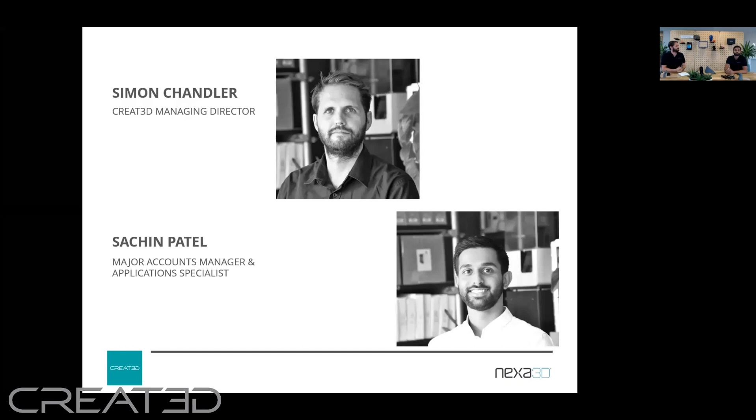We're going to give you some background on who we are as a business, who created us, give you some background on Nexa, talk you through what this technology is and how it works, and also do this live demonstration. My name's Simon Chandler, I'm Managing Director of CREAT3D. I also have my colleague with me. Hi, I'm Sachin Patel, I'm Major Accounts Manager and Applications Specialist.

Briefly, we'll talk about CREAT3D and Nexa, give you the demo, and we'll also give you some background on the materials. Sachin's going to take you through some of the applications and use cases of how businesses and organizations are actually using this technology today, and the benefits they're getting. At the end, there will be a Q&A, so feel free to put your questions in as we go along, or equally put them in at the end, and we'll have time for a few questions depending on what comes up.

CREAT3D are a UK-based additive manufacturing solutions provider. What that means is we work with all aspects of additive manufacturing. The bulk of what we do is we work with organizations to understand how additive manufacturing can add value to your business and can unlock cost savings, efficiency gains, and time savings. We work with you to integrate the equipment into your business in most cases, and we also provide all of the wraparound services, so installation, calibration, training services. We also provide all of the ongoing services like technical support, on-site engineer maintenance, repair services, and of course things like consumables and spare parts, anything you need.

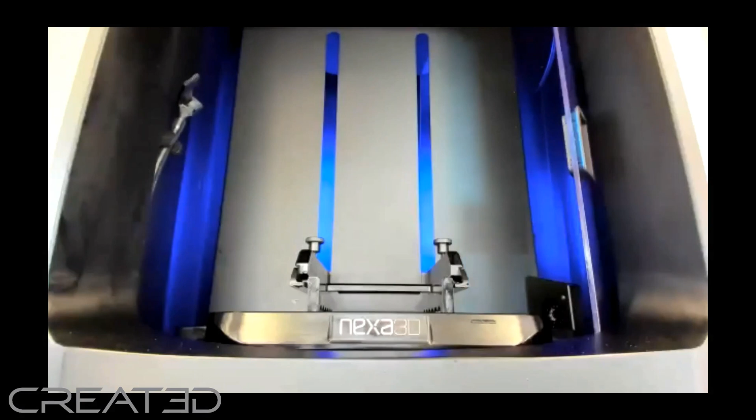So, to the exciting bit. We will now be running a live demonstration of the printer. We have the printer set up and ready to go for you. We're going to shortly transfer over to a different camera. There we go, that should be on your screen now.

My colleague Matthew has actually just initiated the printer, so it's going to be a little bit difficult for you to actually see a huge amount, but you should start to see the build plate rising up and down. The first 6 layers take the longest.

After that, it should be processing at around about 4 seconds per layer. What we're printing today is 126 clips in a single build. The total build time is 11.5 minutes, and that's 157 layers. We're printing this in what's called the XGPP blue resin, which is a prototyping resin, so it is one of the faster resins. If you wanted something in a more functional resin for end-use parts, it would take a little bit longer - probably 20 to 22 minutes to complete the same build in a functional resin.

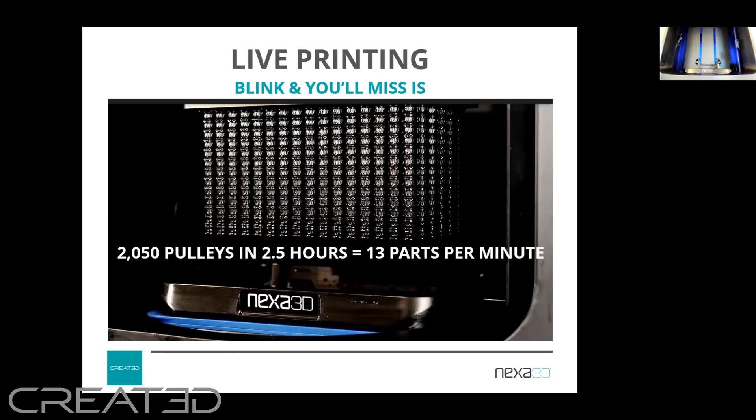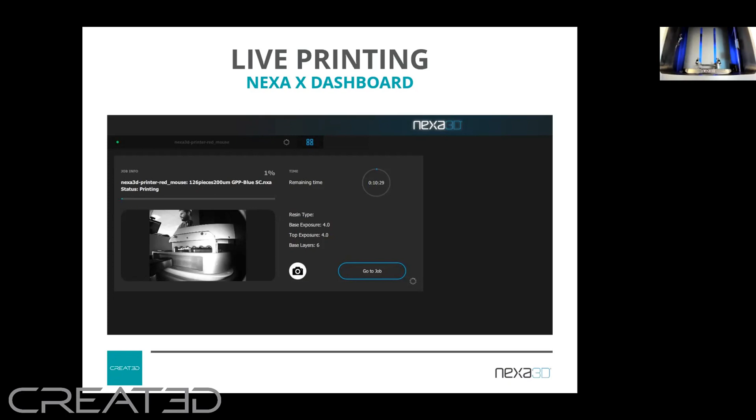To give you a little background on the manufacturer of this technology, as you can see, they're called Nexa3D. Nexa3D were established in 2016. They grew out of an incubator and VC fund called XponentialWorks, based in California. XponentialWorks was started by a chap called Avi Reichental, who some of you will probably recognize. He was the CEO of 3D Systems for a number of years—one of the biggest 3D printer manufacturers in the world.

So he has a good pedigree, and he's assembled a high-class team around him who have developed this technology and grown out of that incubator into Nexa3D. The entire focus of Nexa3D is on taking 3D printing from being a technology used mainly for prototyping or one-offs, through to something fast enough to generate small batches of end-use components—taking it from prototyping into the production sphere. That's why we talk about this being the next generation of 3D printing.

The technology itself is called LSPC, which stands for Lubricant Sublayer Photo Curing. The printer can print at anything up to 10 millimeters per minute across the entire build size. So whether you print one object or fill the build size with multiple objects, the print time is the same per layer, whatever you're doing. If you're printing in a prototyping resin, it's the fastest; if you're printing in a more functional resin, it's a little slower.

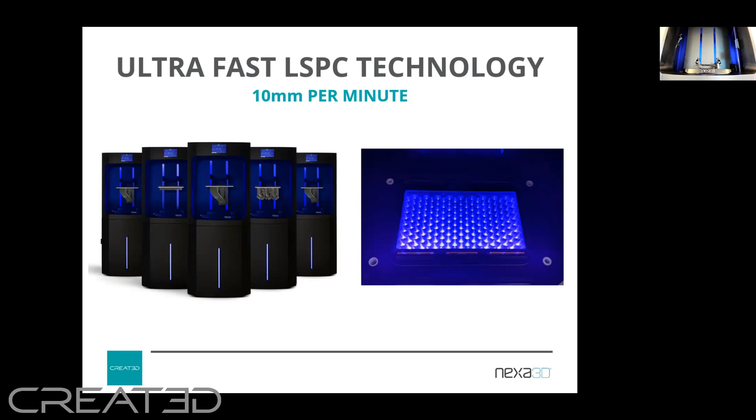How the technology works: at the bottom of the printer is an LED array. Those LEDs shine up through what they call the light guide, which disperses the LEDs in a uniform manner. This means the LED light passes uniformly through the LCD screen sitting above it. The LCD screen's only job is to provide a mask—so in the printer software, each layer tells the LCD screen whether to display as black or white. Where it displays white, the LED light passes through, hitting the membrane that sits above the LCD screen.

The membrane is the really clever piece of technology in this. Above the membrane sits the resin—a liquid resin which is UV curable—and above the resin sits the build plate. The build plate leaves a very thin layer of liquid resin on the membrane, and as the light passes through, it cures that resin. The build plate then rises up layer after layer, growing the part underneath it.

As I said, the clever piece of this technology is the membrane. Because it's self-lubricating, after curing a layer, the build plate can rise up and that sucks fresh resin into the space underneath, which can then be cured, and the process repeats—continually rising and sucking resin up as it goes. One benefit of this technology is that it's fast, but also because it's such a continuous process, you avoid the layering and stepping often seen with other types of 3D printing, so you're able to generate prints that look as though they've been injection molded.

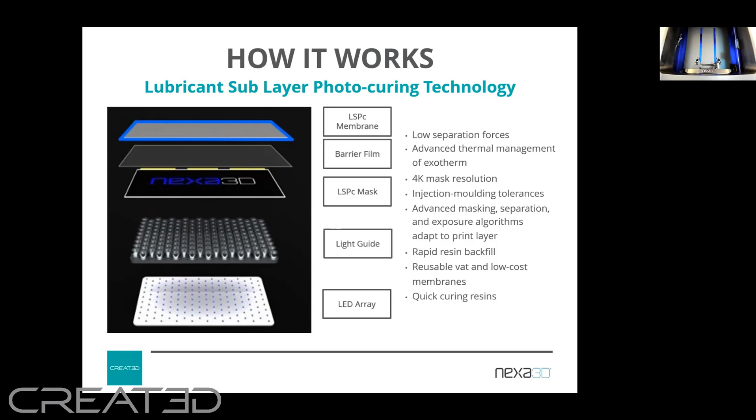Some stats on the printer itself. You have a build size of 280 millimeters by 165 across the XY, and then 400 millimeters in height. Price-wise, you're looking at about £50,000 for the printer itself. And then we have a variety of options for the support plan, various consumable starter kits, wash and cure units if required, and also other options.

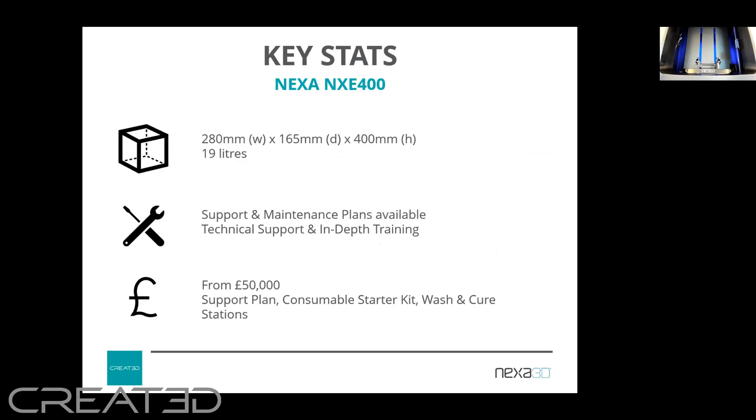So the materials - because of the way that the process works, there's actually quite a wide range of materials which can be printed on this printer. Generally, they fall into three different families: prototyping, functional, and biocompatible. At the moment, there are 8 resins available across those three families. But the interesting thing is that there are new resins being released on quite a consistent basis.

The reason for this is that Nexa3D are able to partner with existing chemical companies. In this instance, the main partner at the moment is Henkel. Because of the way the technology works, they're able to work with Henkel to verify resins that already exist and verify that they actually print consistently on this platform. That means you're getting an increasing amount of resins with different functionalities and different properties becoming available almost on a monthly basis.

In terms of the prototyping resins, you have GPP, clear, blue, and grey. These are out-and-out prototyping resins, very fast, but maybe don't have the functional properties in terms of strength, flexibility, or temperature resistance, for example. There's also 2 others which bridge between prototyping and functional: xCE Black, which is a cyanate ester material, and ABS HT Orange, which is an ABS-like material.

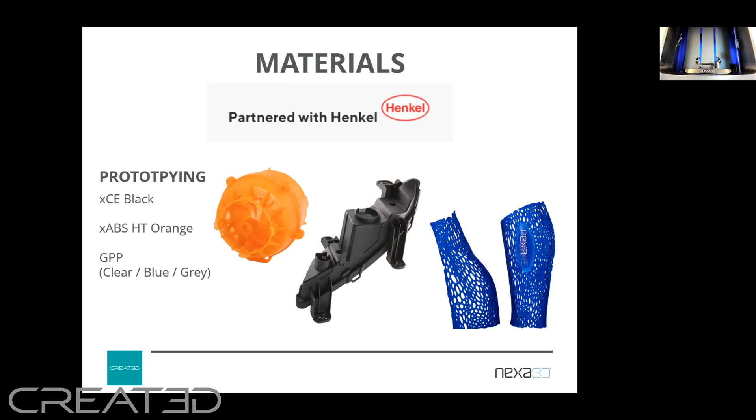So the second family is the functional resins. The xCE Black, as I mentioned, bridges those 2 gaps. This is really because not only does it print at high speed, but both the xCE Black and its sister material, xCE White, have functional properties. These cyanate ester resins are actually already used in things like the automotive industry for end-use components on vehicles. The other material available is the 3843 ABS, which is an ABS-like material.

And then the third one of the family is the biocompatible - this is a certified biocompatible material called XMED 412, which Sachin will touch upon a bit later.

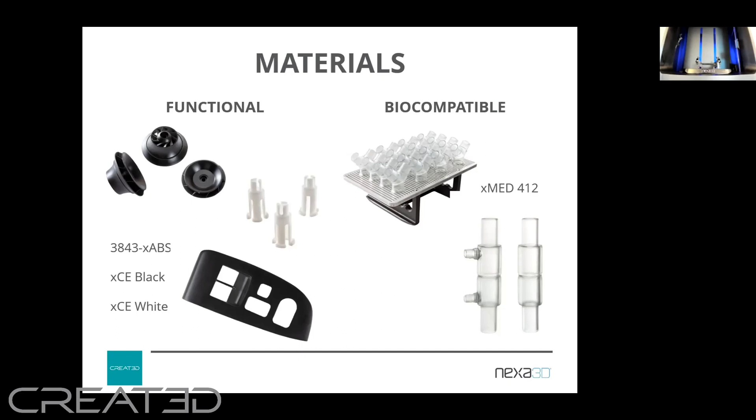In terms of post-processing, as with all of these resin-based 3D printing technologies, it's a three-stage process. The first stage is what you're seeing here on your screen, which is the printing. At the end of this process, the prints will be complete, but they will obviously have uncured resin on them, which needs washing off. So stage 2 is the wash.

The wash cycle can be performed with 3 different rinsing agents. The first one, which is the most popular and a lot of you will know about, is IPA, isopropyl alcohol - that's the most common. There's also TPM, which has been used a bit more recently because of the difficulty in getting hold of IPA due to the COVID-19 situation. IPA has been in high demand.

Because of that, Nexa have developed their own cleaning agent, called X-Clean, which is actually available to purchase now. It works with all the different types of resin-based 3D printing. X-Clean is actually 3 times more absorbent in terms of uncured resin than something like IPA. It also doesn't have the health and safety difficulties that IPA has, so it's much safer and easier to handle. The other advantage is that if you wanted to, there's a distillation process you can do to take out the uncured resin and recycle your X-Clean cleaning agent, enabling you to reuse it.

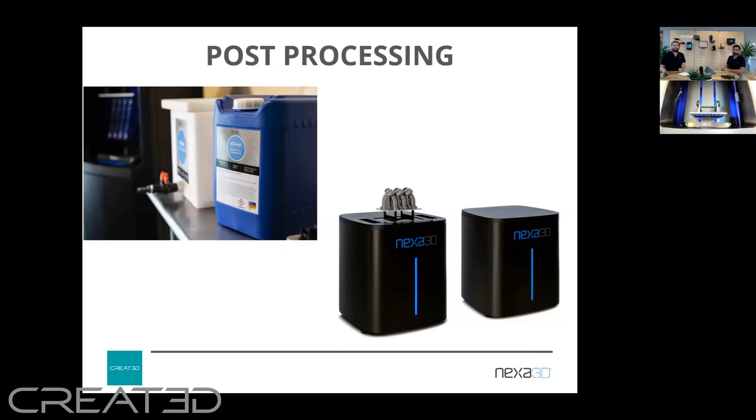So we will skip back and just finish off our presentation for you. Next stage in the presentation, I'll pass over to Sachin, who will take you through some of the real-world applications and how this technology is being used by customers today.

Great, thanks Simon. So before we get into any specific applications, I wanted to first cover how additive manufacturing is being applied in industry today. 3D printing has been around for 30, 40 years, and certainly since I started about 8 years ago, additive manufacturing was really only suitable for prototyping, R&D, and generally for supporting the design cycle.

What we've seen is this development over time, certainly over the last 5 to 10 years, from the days of early additive manufacturing being used for design cycle and prototyping, through to where we are now with the development of materials, technologies, reliability and speed, and seeing more of a movement into production with functional parts like jigs and fixtures, and end-use parts as well, in terms of low batch production, spare parts, legacy components, those sorts of things that we'll be touching on a bit later.

The beauty of what Nexa is doing is it's not only covering the prototyping side of things with super fast speeds now, but also enabling both production and end-use components.

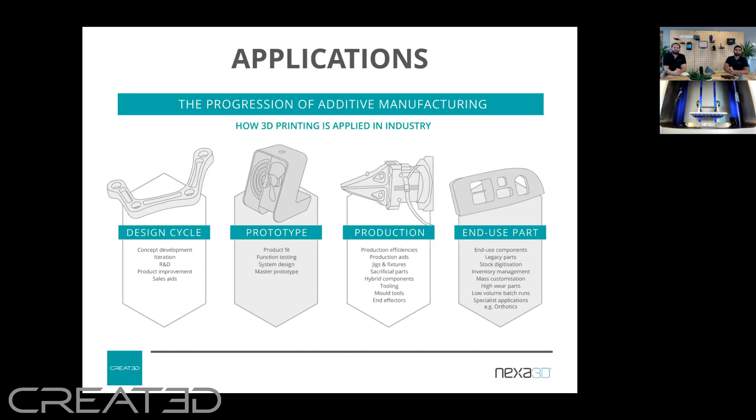What we're going to be focusing on over the next couple of slides are these three key areas: true rapid prototyping, small batch production, and urgent production. And these are things that are really applicable across quite a wide range of industry, from automotive and aerospace through to robotics and automation, as well as more specialist industries like medical and wearables.

So in terms of true rapid prototyping, the ability with Nexa3D to truly meet customer demand, have a much faster turnaround on printed parts, a much shorter time to market, and same day, and in most cases immediate feedback on components.

In terms of small batch production, anything from one-offs to 1,000 or even 2,000 off, without the limitations or costs of mold tooling. But the other thing there is high mix components and mass customization. There's no reason why you couldn't produce 1,000 off, but each one has a slight different variant to it. That's what we mean by high mix parts and true mass customization.

And then finally, moving into urgent production, things like spares and legacy components on existing machinery, any of these temporary fixes and parts that you can use to minimize downtime. And then things like rapid responses to market and environmental changes, without the need for tooling, or even a stop in your production.

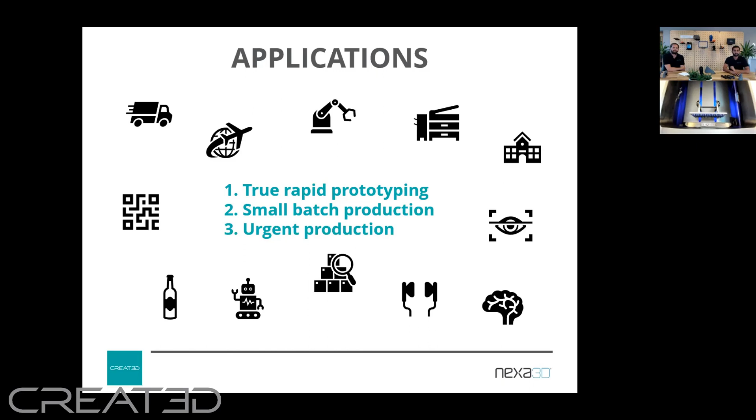And that leads me quite nicely on to our first specific application that we wanted to focus on, which are these nasal swabs here. The material here is the XMed412, which Simon was talking about earlier. So it's a really great example of toolless batch production.

Obviously we all know the problem that we were faced with over the last few months, with the urgent requirement for medical devices and PPE in response to the coronavirus pandemic. What Nexa3D were able to do was work with Henkel to quickly develop this resin and essentially allow them to quickly meet the urgency and demands of production without the costs and limitations of tooling, massively reducing speed to market.

Nexa were able to produce around 5,400 of these swabs per printer per day, which comes out to around 16 seconds per swab. Now, obviously, we understand that at that quantity, injection molding is clearly more suitable. But really, what this allowed Nexa3D to do was cover that stopgap.

On that first day, they were able to produce these parts, while injection molding companies out there were producing the tooling to be able to then go to true mass production with injection molding.

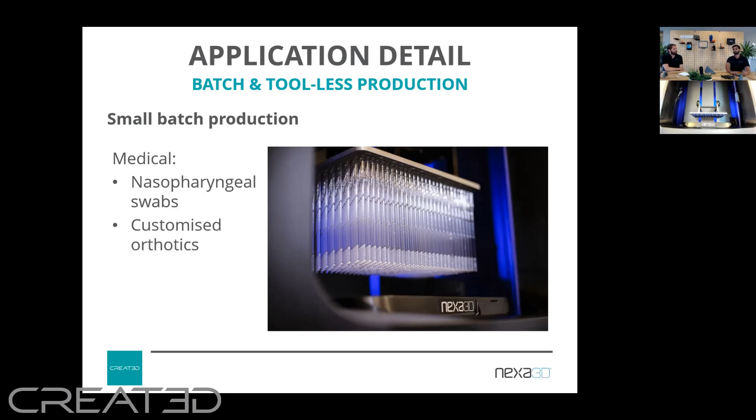Moving on to another example of batch production. We're actually working with an injection molding company at the moment, who we've worked with for a while, but they've approached us recently with a problem they face where they have to turn away business if a client asks them for anything around 500 off.

Just the cost of tooling is too expensive for the client, and then obviously your per-part costs are quite pricey too. So they approached us with this problem, with the idea that 3D printing might be able to solve that. And really the Nexa3D fits perfectly in that space.

So what we were able to do was talk about the Nexa3D being able to complement their current manufacturing capabilities, offering their customers the option for smaller batches in a repeatable fashion as well. So now they have the ability, if it's anything around the injection molding quantities, they've got that as an option.

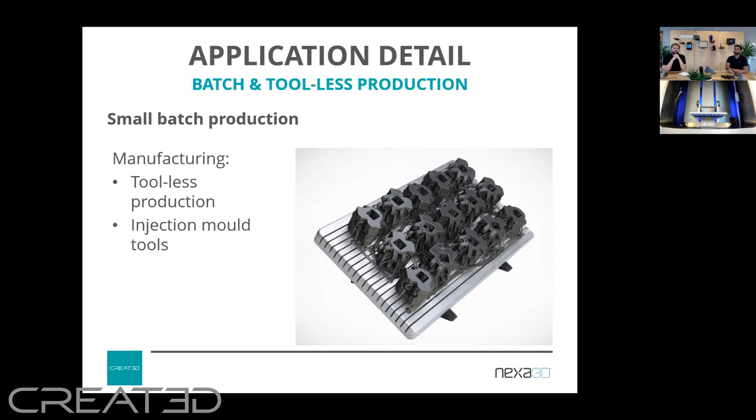But for those smaller jobs, they can offer their clients 3D printing as an option, actually printing the end-use parts close to injection molding quality, which allows them to win business that they wouldn't have been able to win previously.

Moving on to true rapid prototyping, additive manufacturing has always been a very fast turnaround technology, giving engineers and designers the ability to turn around parts within days rather than weeks and months of outsourcing. With Nexa3D, we're speeding up that CAD to part process, offering what we like to call true rapid prototyping. And that turnaround goes from weeks and months to days, to minutes and hours.

A really good example of this is a design consultancy we were working with whose client needed a quick sign off on a new product. They set up a 2-hour meeting in which the client was invited over. They had a printed component that they reviewed in the meeting, and changes were made to the part depending on the client's feedback. The part was then iterated, and those changes were applied to the CAD model. With the Nexa technology, they were able to reprint that part within the same 2-hour meeting, and by the end of it, they were able to present it to the client and have sign off immediately, all within those 2 hours.

So a much shorter design cycle and a much more efficient use of time. Any industry, from design and engineering consultancies to motorsports and energy, these sorts of industries where shortening the design cycle and having immediate data and feedback and speeding up time to market is truly invaluable.

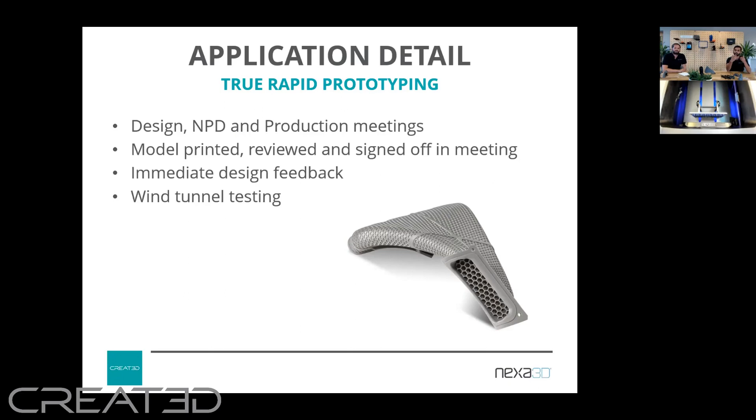And lastly, just a few things on urgent tooling, repairs, and focusing more on machine spares and legacy components. These are parts that generally have potentially long lead times and high costs. What we're doing with the Nexa3D technology is taking the supply chain issue out of the equation. With this technology, you have the ability to print parts immediately as they're required, completely minimizing your downtime.

A great example of this is a robotics company we've been working with for a while now. They're at the stage now where they've been using additive for quite a while, and they're developing robotics and machinery today with additively designed and manufactured components fitted on the machinery. The problem they had is they wanted to eliminate the need for expensive inventory costs for spare parts. So that's the approach they've taken.

They're now producing machinery with parts designed for 3D printing, with the idea that they keep them in a digital inventory, so they're not printing the spares at the moment. That means they don't have potentially 5 or 10 years of storage for these spare parts. When they need them in 5 or 10 years, that's when they can print them from their digital inventory. The benefit of this technology is that at the point they need them, they haven't got to worry about downtime - they can print the parts within minutes.

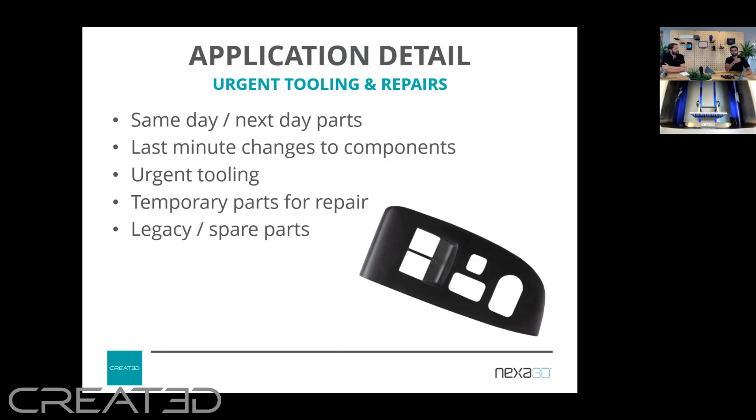So I wanted to dive into some really impressive statistics, starting with the nasal swabs. We were able to print 800 of those on a build plate. That's around 3.5 hours per build, which equates to 16 seconds per swab, and that's in the XMed 412 biocompatible resin. The example just below that is a really neat one, I think Simon's got the part over there.

There are 6 joysticks, each with a slight variation on the design - I believe it was the grip that was slightly different in each of the 6 designs. All 6 parts with a slightly different design were printed in one build, which is around 45 minutes, so that's 7.5 minutes per part, and that's in the GPP grey prototyping resin.

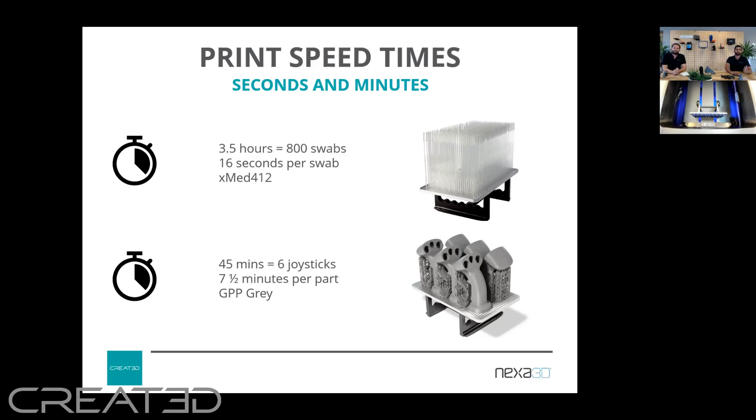The example at the top there has 72 valves that were printed in the GPP blue resin. That's a 41-minute build, which is roughly 34 seconds per valve. This is in a slightly different material, the XCE, which would probably be around 40 seconds per valve - so it's a little bit longer, but still only 40 seconds per part.

The parts just below that are end-use components, the same material as these here - that's the XCE, a functional material, and they're end-use brackets. I think we can fit about 24 of those on a build plate, and that's a 35-minute build, which is roughly 1 minute 45 seconds per part.

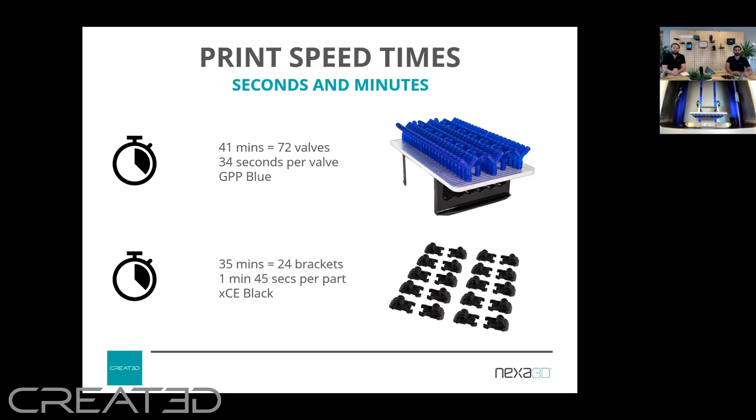And just to put some of these stats into perspective, another really good example that comes to mind is an automotive customer we've been working with for a while, who are currently using our FDM printers for production. We ran a part for them that they print at the moment.

It usually takes 2 days on their traditional filament-based printer for a single part. We managed to print 4 of those parts on a build plate on the Nexa3D printer, and that build took 2 hours. So that's half an hour per part. You went from 2 days for one part to half an hour for one part.

The best thing about this was that when we worked it out, we found we could clear a month's worth of their backlog on one printer in a single working day on the Nexa3D printer. So just to give it some perspective compared to the other stats.

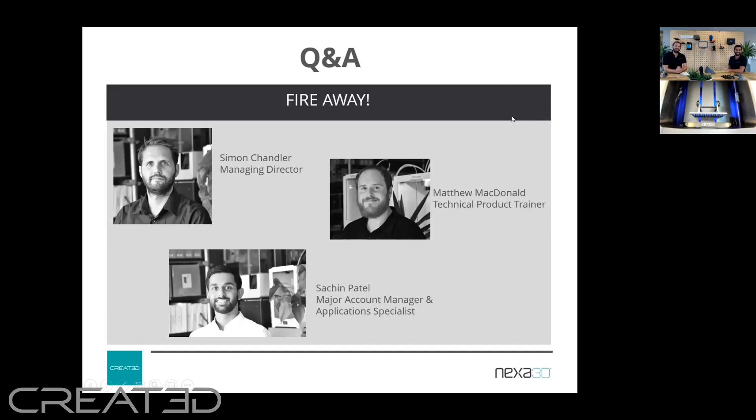So we've got a question: what layer heights can it print at? Just in case you didn't hear that, the question was what layer heights can it print at? That's a good question.

However, we actually deliberately didn't put this information in. I know that sounds slightly strange, but traditionally in our industry, people have always used things like layer heights or resolution as a gauge of the quality a 3D printer can produce. With the Nexa3D and this particular technology, the way it works is it's actually able to produce parts that are visually as good as injection molding. But the reality is it prints at anything from 50, 100, or 200 microns.

So if, for example, we were to talk about a 200 micron print, in the traditional sense of 3D printing, people would think that's a really fat layer height and it'll be really obvious that it's been printed. But actually with this technology, you can't really see the layers. So it's difficult to compare it with other printers on that basis. The short answer is 100 or 200 microns is typical—you generally print at the big fat layer height because that's the quickest, and you still get great prints.